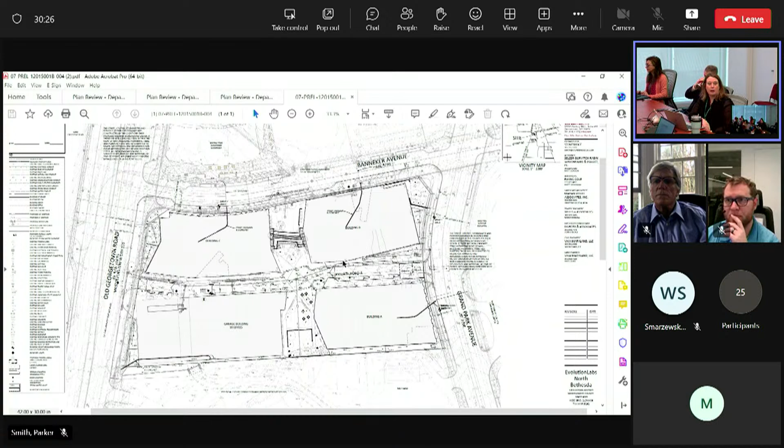I'm gonna turn it over to Josh. Don't turn it over.

Just so everybody knows the structure of the review, Parker's handling the sketch plan and site plan. I'm handling the preliminary plan.

So you got the comments at this point. I think the way we'll structure the meeting, we'll start with the transportation comments, then we'll go to the parks, and then we'll work with the urban design team on their comments. So we can start with the roadway improvements and go from there.

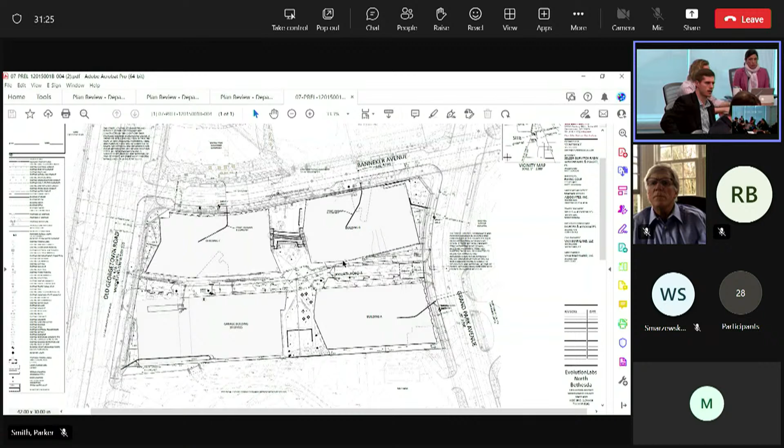No, let's start with roadway improvements. Sounds great. I don't know, Matt, if you want to, we've had some email correspondence going back and forth over the last 24 hours, specifically about the request for some offsite improvements, bike lanes, Grand Park, and one other. We're going to talk to DOT about that, but for frontage improvements, because we want to nail down the design and all those details. I think we could talk about that today.

I don't think we really need to worry about the offsite stuff. We can work with DOT on that. Well, DOT is here, so. I know, but it's sort of a separate issue from the design. It's more like whose responsibility is it for the cost.

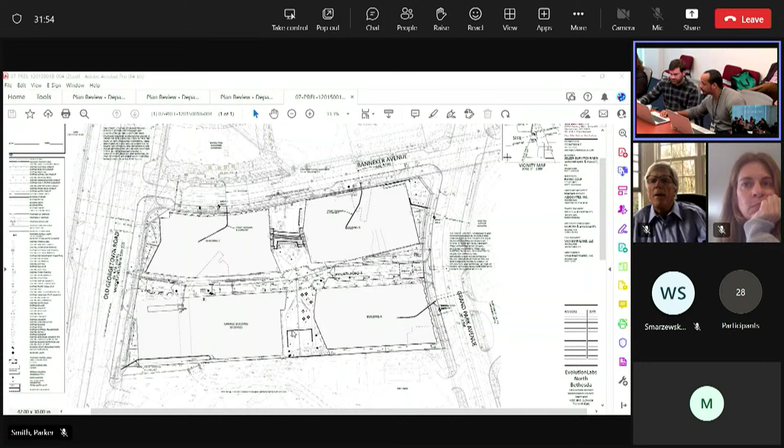Okay, yeah. And I guess in regards to the design, is there a particular street we want to start with that y'all have concerns with at first? Because we can kind of just work our way through. Whatever you wanted, yeah, we'll work through them all, I guess.

So did y'all see the attachment for the preliminary plan, like this document, or sorry, I'm not sure.

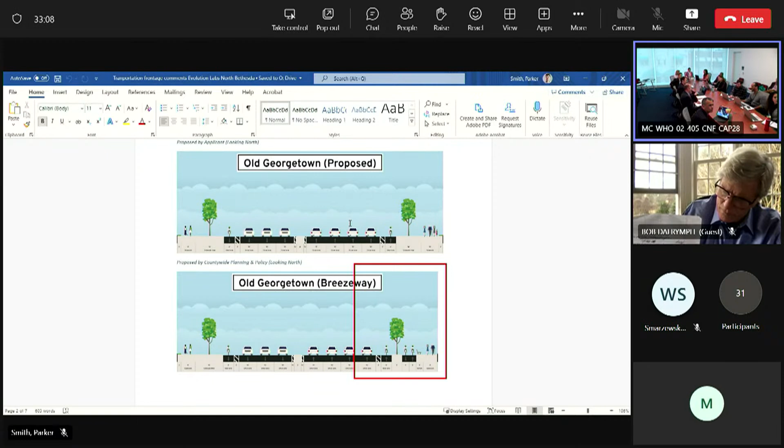So sorry, I must admit, this document here that's up on the screen, was this included in what was sent back? Yeah, I uploaded it. It's an upload document under the preliminary plan. So if you haven't seen it, basically it's showing the cross section and the details of each right of way. Except for Banneker, that wasn't in there, but we will be able to provide that one as well. Yeah, that'd be helpful.

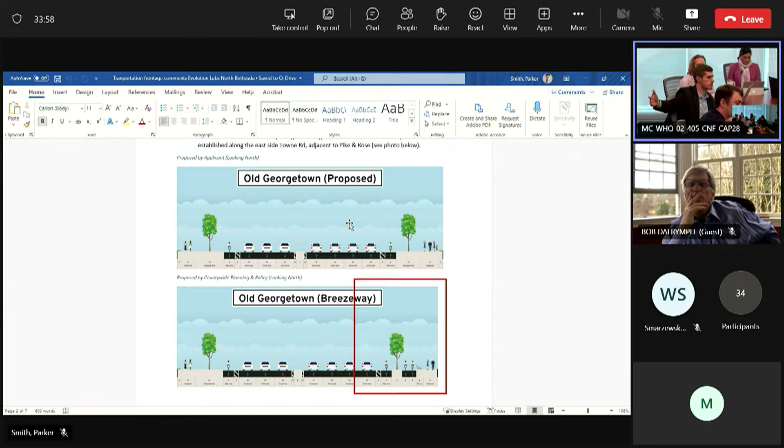I mean, taking a step back for a minute, these cross sections here - Old Georgetown, Banneker Avenue, Grand Park Avenue - it's part of the Western Workaround, right? All that streetscape is currently constructed, right? Like on Old Georgetown, there is a bike lane. I don't know if from curb to property line that's currently reflected, but is that essentially your comment? Is it that all the improvements that were just put in as part of the Western Workaround, you want us to change as part of our application to match these cross sections? Is that kind of what you're getting at?

So when we made our comments, we took into account the Western Workaround. A lot of the comments are curb to your property line, or at least with Grand Park, we're not necessarily asking you to move the curb out. What we're saying is repurposing areas that are within the Western Workaround, cutting it out. For at least Old Georgetown, we're asking you to construct the breezeway.

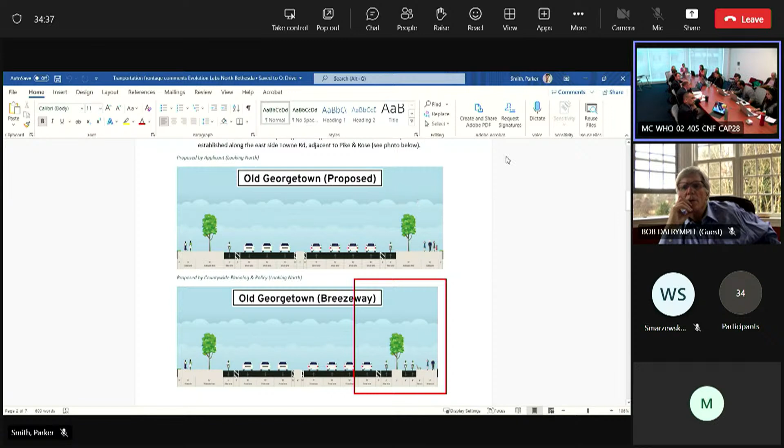So essentially what we're asking you is to provide this bikeway facility here. Currently there's just an asphalt path, and at the street there's stanchions or striping running up the street. So what we're asking you to do is to provide the planting buffer or tree panel, the bikeway, that's part of the countywide master plan. We're showing a bench here, but essentially a sidewalk condition into your frontage is what we're asking for, at least for this, and this is consistent with other areas along Old Georgetown.

So the 14 feet, just to be clear, plus the sidewalk area.

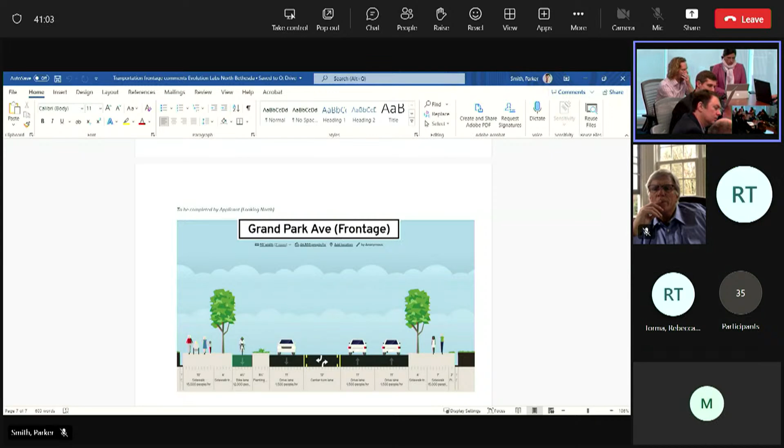Our hope there is that we could turn left to head north on Grand Park Avenue out of the private drive. Yeah, and we don't have a problem with that, we just wanted to align it. It's almost there, if you can just nudge it a little further and make it align better. Technical term, we'll nudge it. Got it. Well, I'm very technical when it comes to engineering, so.

We're talking about this side, right? Yes, that's what we're talking about, right.

Hey Rebecca, this is Ian at Vika again. There's only one lane coming outbound from that garage. That would mean we'd have to move that road a pretty substantial amount to the north. See what you can do. I think I'll have to get somebody else to look at it as well before we can say it's okay.

Ian, do you assume we're in line? We're already pinched on that building 5 footprint, and then with stormwater management and other things, but we'll definitely take a look. We have the line work, we need to look at that, right Ian? Yes.

Okay, great. I think that covers at least the access points, the frontage. Did we talk about Banneker access? Oh, I was going to jump to you mentioning the loading dock. Yeah, that's what I was going to jump to now.

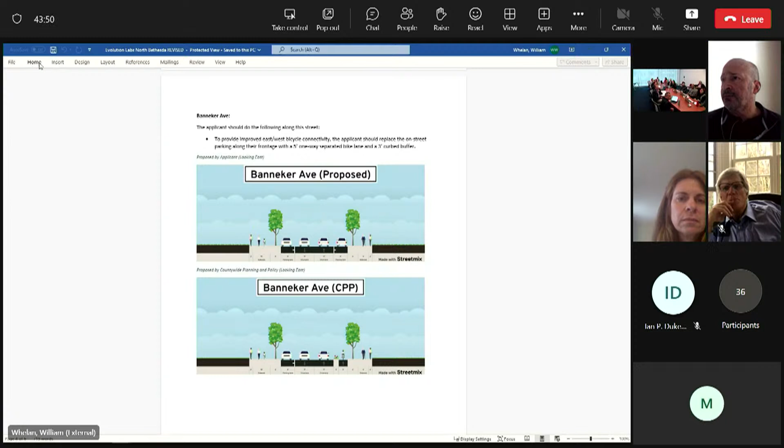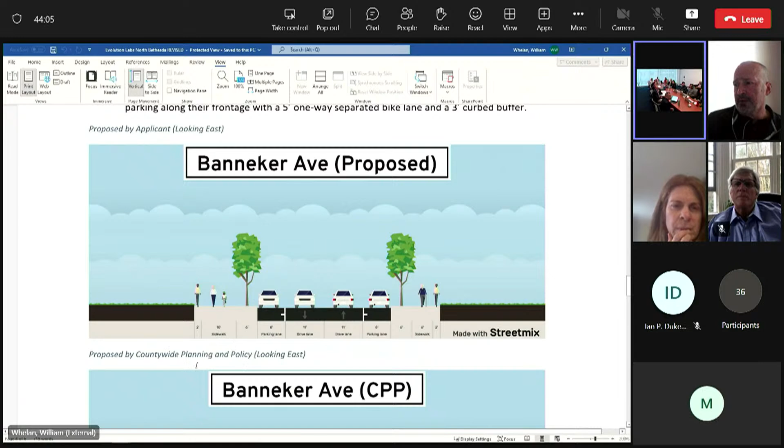So yeah, this is what's out there and it's going to stay. Because there's no bike lanes on Banneker, right? That's correct, yeah, there's no proposed bike lanes - the bike master plan doesn't call for bike lanes on Banneker. Not that I'm aware. Correct. Yeah, that's correct. And this is the applicant side over here, on the right, and this 10-foot sidewalk is already in on the opposite side.

Okay, jump back and share the screen.

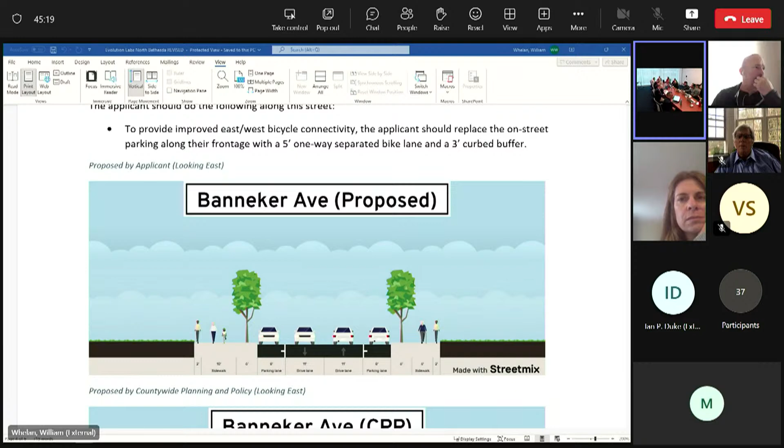Before we move off of Old Georgetown, Troy, you made a comment about undergrounding utilities on Old Georgetown - you're talking about the telecom lines over there, correct? I guess it's just a general comment, in regards to if there's anything the Western Workaround has underground along your frontage, we would be looking for those to be underground. I think Old Georgetown had some, at least from the street views. I didn't see anything else on Banneker or Grand Park.

Let's discuss the building loading dock. We've been talking about that access point for a while, so I'll give it over to Eric to speak.

We're looking for it to be relocated to the internal private drive or private street, to remove that access off of Banneker.

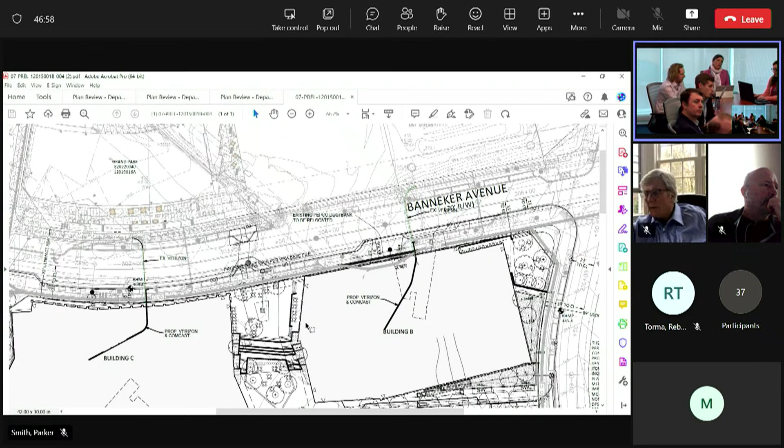Got it. So yeah, we spent a lot of time talking about this previously, and we met with you guys a couple times to go through it all. We studied it physically, and we can make it work physically. We still think though that it compromises the overall site design, and more specifically compromises the through-block connection, which we really think is an important aspect of the site plan.

If you wouldn't mind zooming out for a second so I can speak a little more to that. So with the way Building B is designed, and because we really can't get truck turning movements to come off of Old Georgetown, most of the loading is going to have to come in off of Grand Park Avenue.

Based on the geometry of the building, the way the roads are angled, the grades, how all that's shaken out on the east side of the site, trucks are going to have to turn in and basically stage on the Woonerf, right in the very middle of the site where all the pedestrians are coming to get to Buildings B and C, in order to back into the loading dock for Building B.

In addition to that, the way the grades are working, we're having a really hard time figuring out how to get the loading dock elevation to work with the existing grades, because the grade is sloping west to east fairly aggressively at this point. Yeah, the ground floor of Building B is actually partially submerged in that corner by like 6 feet or something, in that southeast corner.

So it would really impact the sidewalk we have over there, the access through the middle of the site for pedestrians. We just think it creates a conflict that would really impact what we're trying to create in the middle of the site.

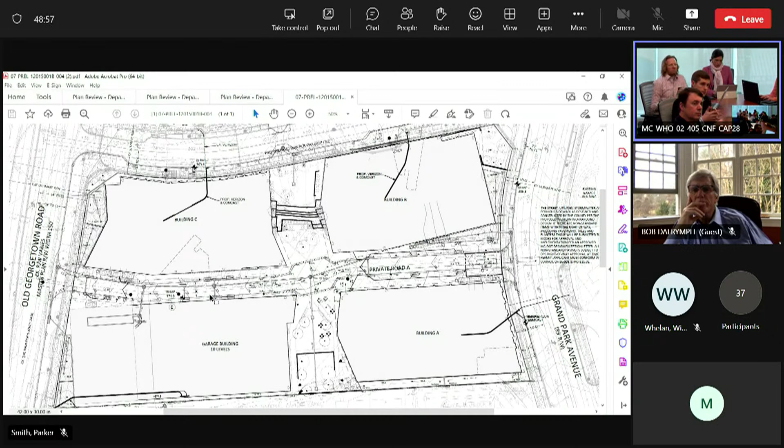So our proposal is to continue with Building B access on Banneker. I think it creates less conflicts with pedestrians and overall site flow through the site. There's really not a lot of activity that's going to be on that north side of the site there, so we don't really see it as impacting too much what's happening on the other side.

I know they've got a bunch of retail on the other side of the street, but the master plan intent is that the north side of the street is really the pedestrian walkway, with the wider sidewalk and stuff. So we're happy to continue discussing it, we're open to ideas. We've spent a lot of time looking at this, and we still think that for Building B, it makes the most sense to have that on the north side of the building off Banneker.

Chris, if I may jump in - for Building C, how does the truck go into the loading? Isn't it the same way, that they have to drive all over the Woonerf?

Staging to reverse and pull in, they're towards Old Georgetown, so they're basically between the parking garage and Building C, and then they pull in. For Building B, their position would start through the Woonerf, and then they would back in from that location.

I think there were comments about enhancing or making sure that we had trees and sidewalks across this east-west access. That's absolutely the way we see it - having the ability for pedestrians to flow east-west in addition to north-south.

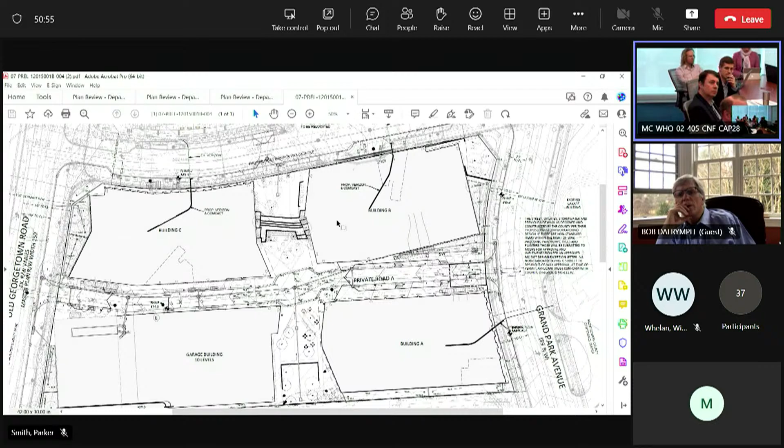If I just have a question - logistically, do we have to decide this with this application? Because you're not building that building right now. But it's a preliminary plan, so if the access points get set, I think we sort of have to decide it, yeah, with the sketch and circulation.

As we noted before, Banneker is supposed to be a very significant east-west street for the whole plan area, not just development. It's called Market Street Promenade, and we're really trying to locate active uses along it on both sides of the street. We understand you all don't have a lot of doors opening.

I think that's a compromise we've kind of arrived at with you all, given your program requirements. We're still trying to minimize completely inactive and service frontages along that street. And so there's Banneker, and then there's this parallel street that you're creating.

Even in the way the private road A is currently designed, it's really serving two purposes. I think you guys are struggling with that yourself, in that you want this to be a very pedestrian-oriented Woonerf, but it's also the main access to this parking garage that has all the parking for this project in it. So it is going to have a lot of car traffic on it.

So I think that's kind of what is at the table here, is this tension: is this really going to be a pedestrian space in the way we are talking about it? Or is it going to be more of an alley, service road that services these very functional aspects that the buildings also need?

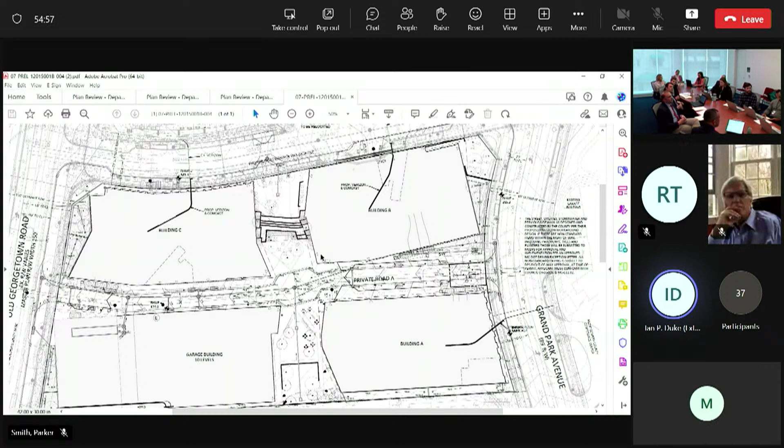So that's why we felt it would make more sense to have limited loading activity with a loading manager for building B's use. And like I was saying to start with, it is complex because really it's almost like—

From the Woonerf east, it is a very mixed, vehicular but mostly pedestrian space. And then from the Woonerf west, it's really more alley-like with loading and garage access.

And I think what we are trying to suggest is that if you're thinking of putting loading onto the primary pedestrian spine of the plan area, then you should really treat your driveway as a Woonerf along its entire length.

Ian, I think there'll be a lot of people parking in this garage who will be going to Wall Park. They will exit out of the garage, walk along the western edge of the Woonerf, and try to get to that through-block connection and get to the park.

So currently, I think it's two types of streets and the loading is off on another street. What we are suggesting is you either take the approach that this whole thing is a utilitarian roadway, with all the loading off of it, and you focus on the public streets as the primary pedestrian movement and through-block connection, or you consider the entire length of the street as a pedestrian-scaled, pedestrian-designed Woonerf that gives the primary use of the space to the pedestrians.

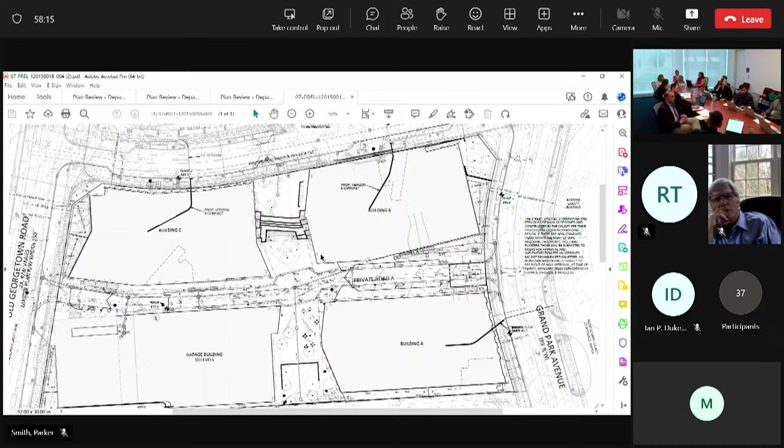Maybe as you are designing that woonerf, which sounds like it's going to be a private street, you're working with DOT and you're working with Troy, and Troy's pulling in the urban designers to make sure it's functioning in a way that accommodates all modes, because pedestrians is like the number one - we recognize there's a lot you're trying to do, but the shared street does have some great benefits, and typically it has a flush curb, so you can accommodate all modes in a smaller space, which is really great. So I'm wondering if some more design detail needs to be worked out, but the nice thing is we don't have to do that right now because we have a little bit of time before you get to the board to work out those details.

Okay. I think what you're suggesting is where the conflict is - essentially that middle street seems to be more of an alley with a very nice green open space coming inward across it going north-south. The conflict is trying to make the east-west street after that crossing something special, and I don't think it necessarily can be that.

Because of all the parking and the services and so on. The other thing is that as you stated, Banneker is going to be a very, very important pedestrian street, particularly on the other side. And I would suggest, particularly coming down from that other side across the crosswalk to that corner, where you really only have the quote-unquote public space besides the lobbies on these buildings.

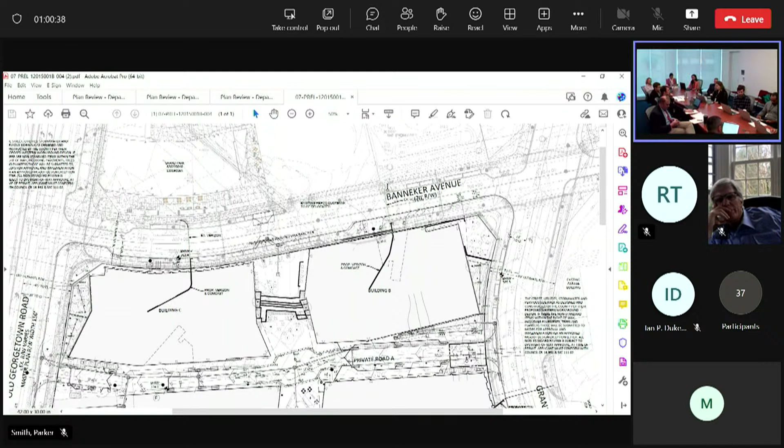And I think we really need to follow the master plan on Banneker and make it as special, absolutely special, as that other side is going to be. And if it's all said and done over there, dynamite, and I think it will help. I mean your people are gonna want to cross and go over to that, I would imagine, frequently. So all of that - we need to enliven that street as much as possible, and without service doors.

I think we need to see an alternative iteration of this. First, you'll have to show us what the loading dock in the street is doing. Then we probably need to look at a version of the shared street or private road A, designed in its entirety as a shared street, with a loading dock on Banneker that's as compact and tight as possible. Then when we look at those two things, we can work with you to get to a decision that works for everybody.

Carrie, does that make sense? I was just going to ask if it was clear. Basically, what we're saying is the Banneker loading dock can stay, however, on the condition that the shared street, the east-west street, is more of a shared street.

We can show you some examples of where we think that works. Having trees is so important to that experience, having a slow area where people can drive but not at high speeds, and pedestrians first throughout that corridor. The activation at the ground level is also important. I know that's a further detail, but those things are all coming together. Hopefully that gives you a pretty clear direction of what we're saying.

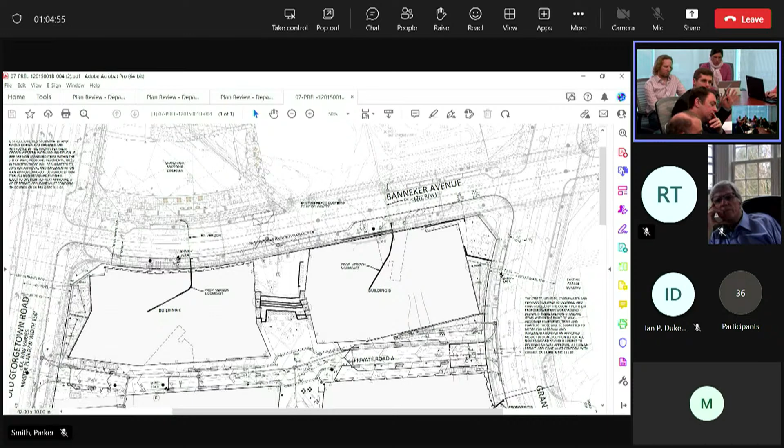Okay, well, let us take a couple days to come up with some sketches. We can pull the old ones we did from the fall, Brett, on the interior stuff, and really study that west half, then we'll regroup with you guys.

Another project under review right now that I think has some similarities might be 5500 Wisconsin. The drawings are all public, you guys can look it up. It does have a similar condition, there's a through block connection.

One in Friendship Heights. It has parking and loading entrances off of the space, some lobbies and things, and I think that applicant team is working with us extensively to make that a pedestrian-focused experience.

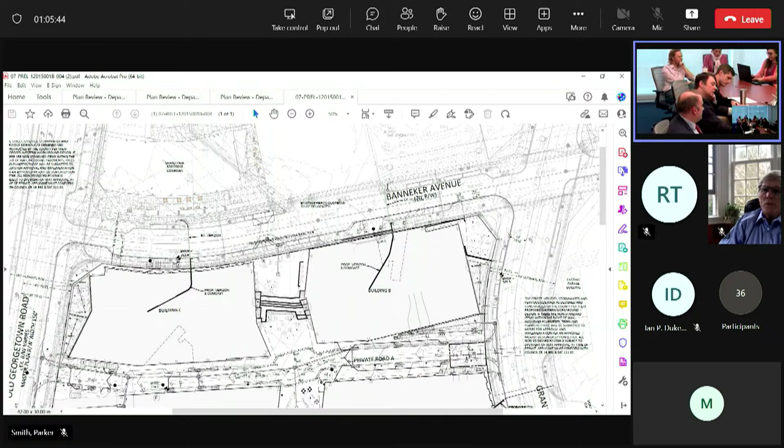Brooks Brothers site, yeah. So the latest version that's online has your comments incorporated? I believe so. We'll look at it.

Without all the complications of working with the village. Yeah, ours is easier.

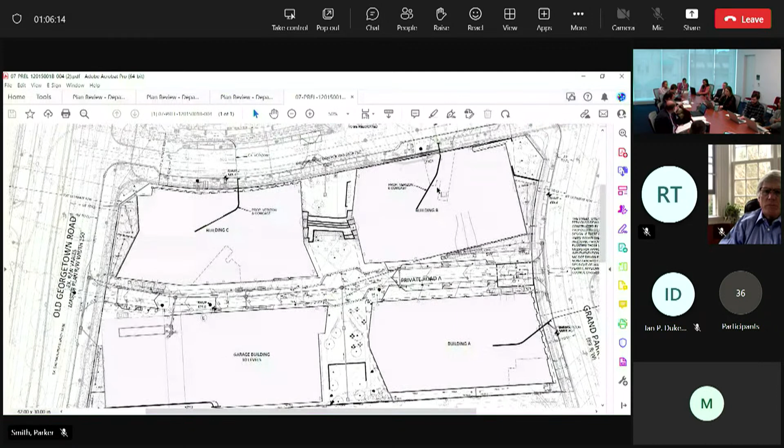Troy, I think we covered that, at least the transportation half. If there were any other major conflicts, I guess we missed them. Ian, did you have anything else on transportation? I don't believe so.

We had some minor suggestions on the architecture, follow-up comments or questions. I think we'll get to that later. Yeah, we can jump to the comments at this point.

I think what I had structured with the stormwater management facility is at least tied to this work program, at least to the site plan. So I know the original comment was that that should be relocated back onto your site. And of course that component is tied to the facility.

But just to be clear, there will need to be some stormwater management over the roadway. I believe it's fair to accommodate some of the stormwater management for the parking of the building to replace the wall park surface lot, which is my understanding of how it was organized with the tables. That was our original intent. I think I communicated unclearly to my team, which is why they showed the whole garage there.

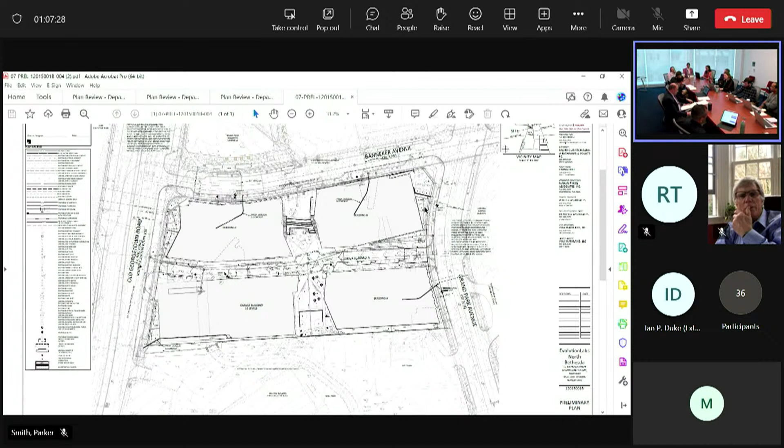Yeah, I think there may be some room for discussion along those lines. The standard starting point is looking at parkland, and if we are using parkland to provide stormwater treatment for another private development, that's using parkland for private benefit. Yes, it's for the public, so that is not our intent. I don't know.

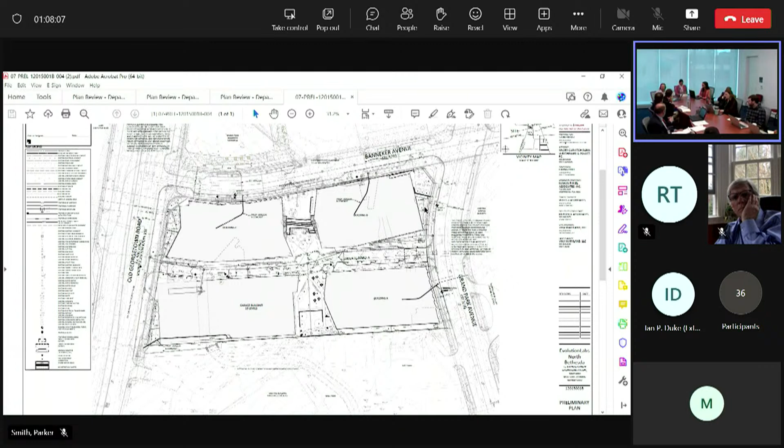I think our initial take looking at the drawings was that it's hard to see that there, and I hear what you're saying about the access drive eventually requiring some of it. There may be a way to find some combination there, so I think it's something to keep talking about. But certainly any stormwater ending up on parkland is going to have to be related to the driveway and those things as well.

I guess that falls into the next part with the access road, where we're separating out the process. Essentially, I think we've all agreed at least it's going to be some type of mandatory referral process.

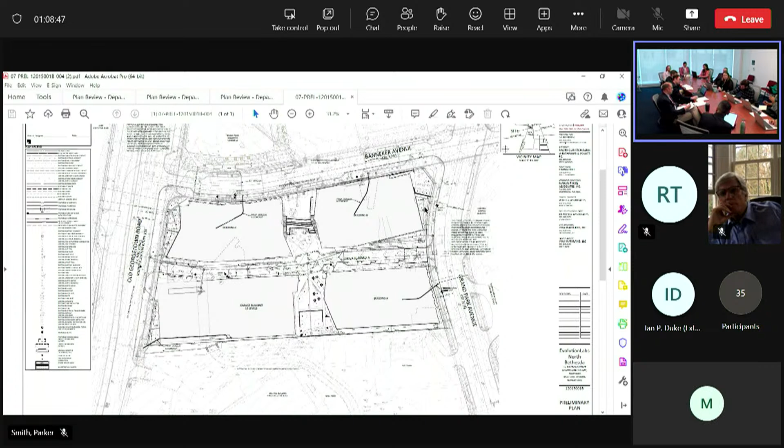For that mandatory referral, we will probably be looking for that to go to the board at the same time as this application goes. It's a 60-day process, so we'll be looking for that to be synced up with this joint application.

So Henry, procedurally, the Parks Department takes that to the board, not the applicant, but we need to get you plans and drawings. No, we're looking at this as though the county is applying for a project on parkland, and they would be the applicant for the referral. So we'd need to work with DGS. We would do it on behalf of DGS.

And so that kind of addresses the stormwater management, since it's being tied to the road, and that mandatory referral is facilitating the road. I'm looking at it all together. Right, as we've discussed, figuring those two pieces out, since there's a lot of intersection in how they combine.

I guess even with forest conservation, at least with that stormwater management facility, it would be tied to the mandatory referral, but also the forest conservation plan is tied to your site plan phase one, because the LOD depends on where the LOD is. Ian, you looked at that, right? There is an approved forest conservation plan under Gables.

Aside from the LOD that is on the Parks property, which I'll get to in a second, we have a smaller LOD than we had with Gables. I think most of that has to do with land that is now already taken over by right of way. We had other elements where we were reaching out for utility connections that we no longer need because the utilities have all been relocated and done. But our LOD is smaller — the certificate of compliance covers more than we would need.

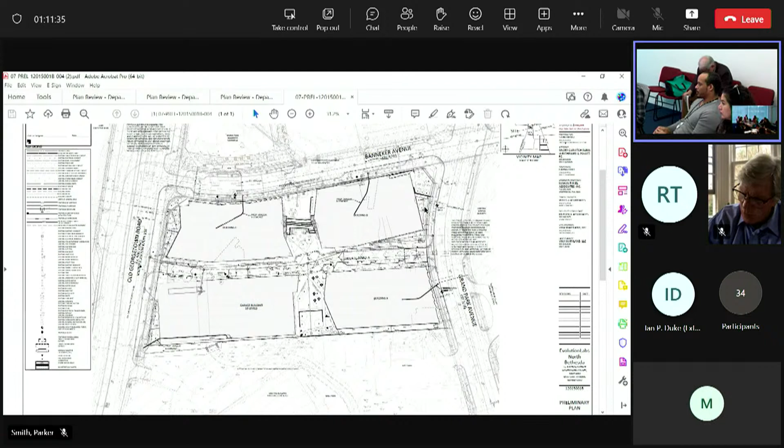So, just to be clear, we're gonna amend what we submitted to make it clear that the stormwater management requirements for the private development, the sketch preliminary site plan, is gonna be shown on that plan somewhere on our property. No idea where, but we'll figure it out, how we're gonna do that.

And then anything that has to do with parks and the access road, that's all gonna be shown in a separate plan that'll be approved through mandatory referral. Got it. Because that mandatory referral plan is something that could be done pretty quickly. Mandatory referrals require a 60-day review.

So the sooner you get that in, the better. We could potentially do that at the same time as this project.

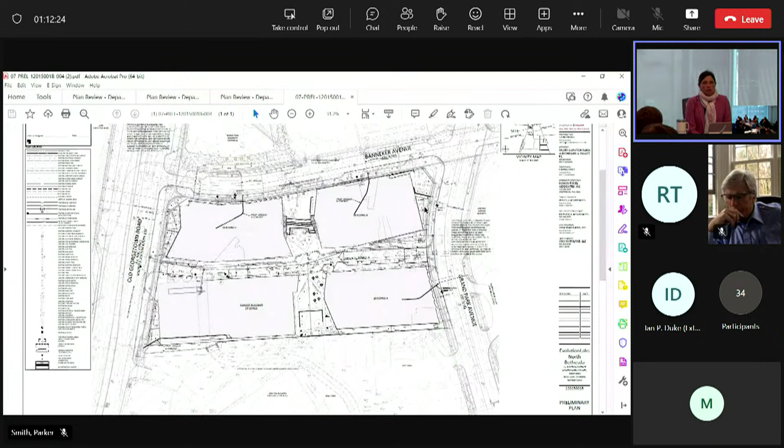Yeah, we just have a lot of work we need to do. Yes, I understand there's confusion on the number of spots, number of parking spaces and stuff. So there's essentially been little to no design with parks on what that roadway is gonna look like.

Well, if anything, you could start the conversation and we could try to knock some of that out now, just because there's so much happening.

Well, yeah, if the timing, so in our thinking here, the mandatory referral is kind of the parent plan, and it has to be, the FCP has to be attached to that parent application, whether it's a mandatory referral, site plan and subdivision, or maybe even a park facility plan.

So you could do a two-part mandatory referral. One is for kind of the disposition part of it, which you've already gone beyond that, I think.

I'm just wondering, somehow it's going to be difficult for us to, since you have an FCP that has to get approved with the park property, how we kick that down the road. Well, I'm not, you can't, it has to go with it.

Yeah, I mean, we talked about it a little bit yesterday. Like, I mean, we understand that we're gonna have to figure all this out kind of concurrently, right? Because I don't want something that shows on the mandatory referral, then go have to change what we have on the site plan. So, yeah, I mean, whether they go to the board at the same time or not, I think we at least need to have...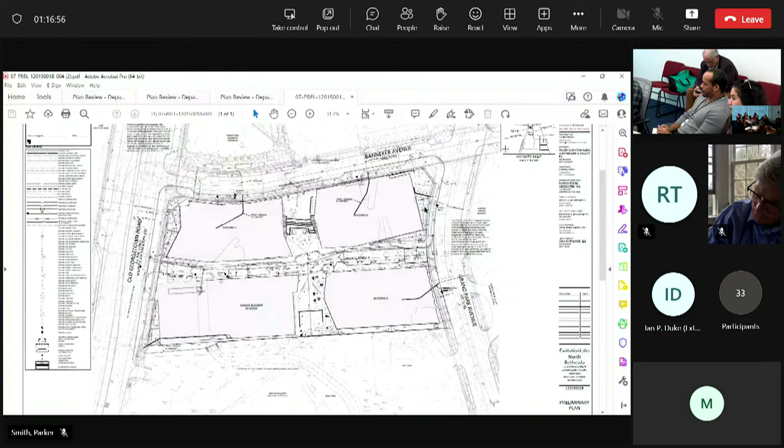It's okay to be determined, so we'll just leave a note on there and take away the dashed roadway. Right now it looks like you're building it, so it's too detailed. It'd probably work better on the access or connectivity exhibit, where we dash in all the different bikeways and pedestrian movements. I think it's fine to show it conceptually.

Like I said, we're going to be talking about it, and it'll be part of the planning board discussion. But I don't want the board to be confused about what they're approving.

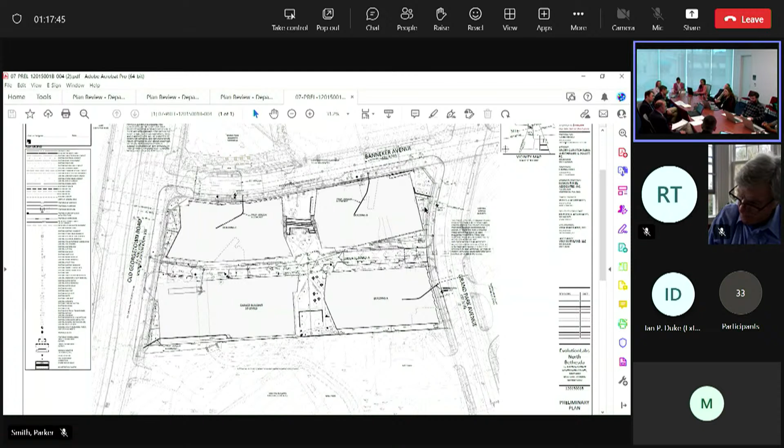Was there any other major parks comments, Henry, that you want to touch on? I think most of the other stuff we've started to work on. We're scheduling to get together again next week to keep working on this. I think everybody is on the same page on all the stuff we need to be working on, which makes me feel like there's probably other things to spend time on today.

I guess the other thing was fire access. There's a 50-foot fire access requirement that looks like it's going to be part of parkland, so that's at least tied to this site plan. Yeah, it kind of gets back to the roadway, the through-block east-west road. The fire department obviously needs access on the south side of the parking garage to fight a fire. We can't really push the garage further north because that would pinch the internal roadway.

The alternate is to just have a big concrete shear wall that's 100 feet high to get the fire rating needed, which I don't think anyone really wants to do because that conflicts with some of the design comments we wanted. So I want to spend some more time talking to Henry about it, see if we can come up with some ideas on what to do. We need to figure it out. It's a lot of competing interests that we need to take into account here, so I'm trying to figure that out.

Yeah, and that's definitely something that's got to be situated within the site plan and carried over to the mandatory referral. It's a site plan issue we need to figure out. Yes, I agree.

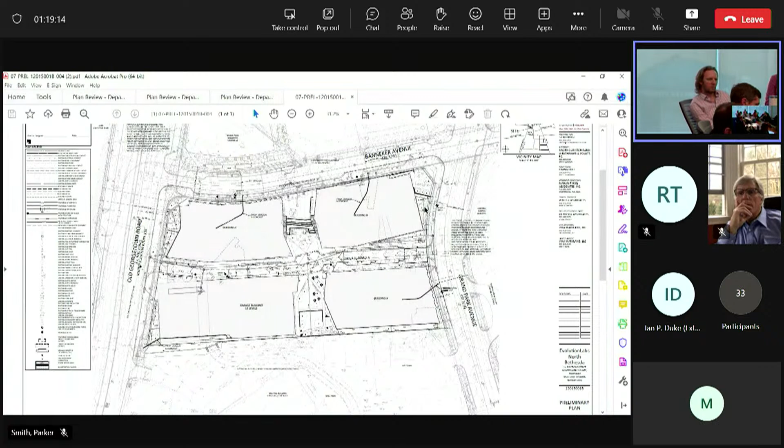So I think that covers it, unless y'all had anything else on the park side, and then we can jump to the urban design comments and the architecture. I don't think I have anything else for parks.

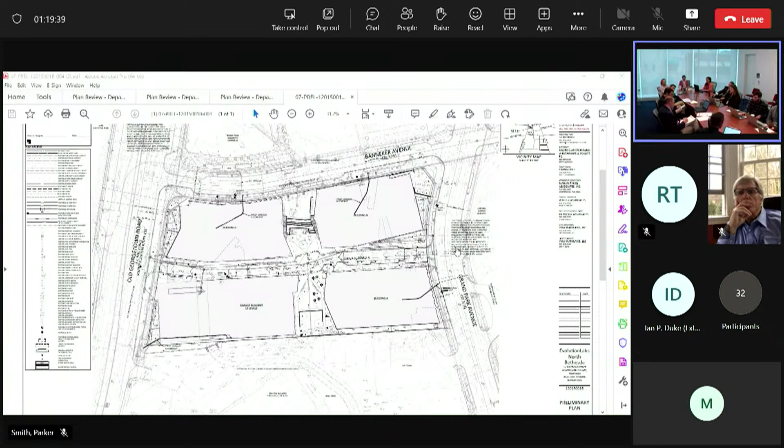All right, no, I'm not. Okay, I can do it. There we go.

To kind of summarize our architectural or urban design comments for the site plan application, I think you guys are suggesting that the northern area where buildings B and C will be is gonna be like an interim open space, so we just want more clarity on that.

I think our intent was that that just becomes a seeded, open lawn area. You proposed that it's not off limits to the public. We just want to make sure that it's not fenced off and it's open for use. I need to talk to Gables and make sure they're clear with that.

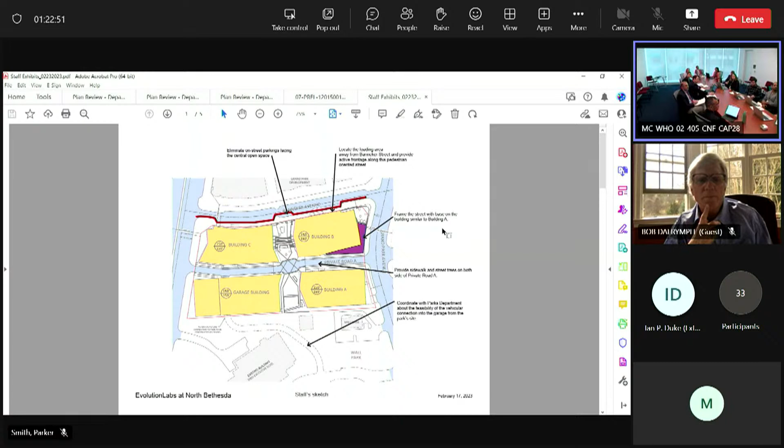Have you guys seen the renderings that we shared as part of our community meeting? That was the colored rendering last year, in December. Yes, we have some of those. One of the comments was to provide those images as a part of this next submission.

Yeah, I mean, we will. We could show them today if you'd like to talk specifically to them. So if we can provide it on a next round or some detail, you want to sort of pull it up? I can bring that up right now.

I can share them, Brett. Good morning, everyone. There we go, it's good. Yes, go to the next one. Yes, the next one.

So yeah, this was kind of... well, I mean, you can speak to this. Yeah, I mean, I'm not gonna pretend I'm an architect. But you do so well.

Across the entire site, we're looking at this lower area that is more pedestrian scaled, has a rhythm, a cadence to it. That was no different on the garage. We're going to look at some of the other comments in a minute, but generally because the site's sloping, we start at one side at a certain height, and then it becomes massive toward the other end of the site just because of the slope. So we get nearly a whole floor difference between the ends - we're at like two floors here, three floors when we hit Old Georgetown.

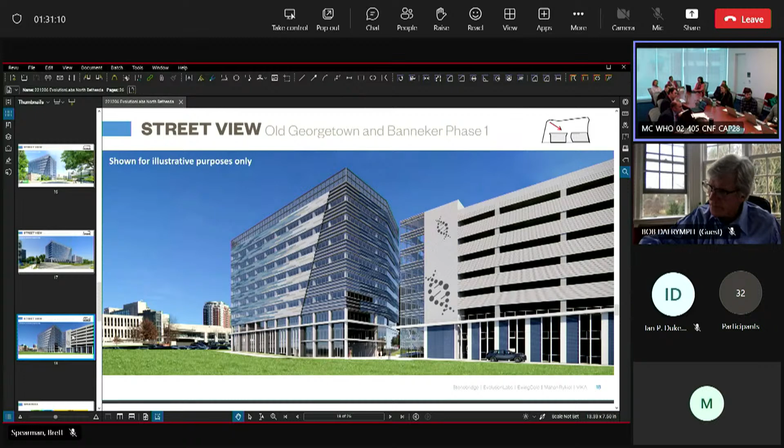Yeah, there were some suggestions on the elevations for building A that we submitted on our staff exhibits. I don't know if you saw that. We saw that, yeah. And so basically the idea was to take this elevation instead of breaking it in half, break it on the thirds, eastern elevation essentially. Would you mind sharing my sketch part there?

If you don't mind, staff. Yeah, it's just almost equal, not quite. But I think this massing that you are showing definitely helps us understand it better. That elevation was split, a bit in the middle. Yeah, it is kind of in the middle. So we thought if the proportion would be like 1/3, 2/3 or something in that range.

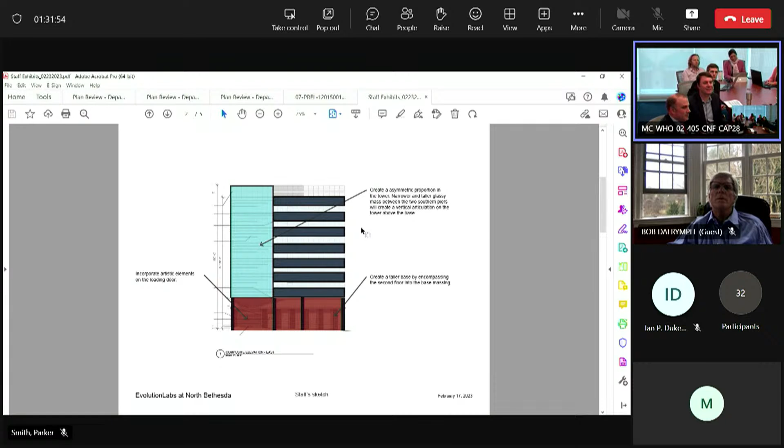Kind of like extend through one of the columns that you have at the base. We thought that would be a better proportion if the glass part would be narrower.

Yeah, and I think the reveal, we're also coming out, it's inflecting a bit, yeah. Right, we figured that later when we saw the other. We noticed that your base is extruding out with the shadow, so that's why those massing and perspective views will help us understand it better.

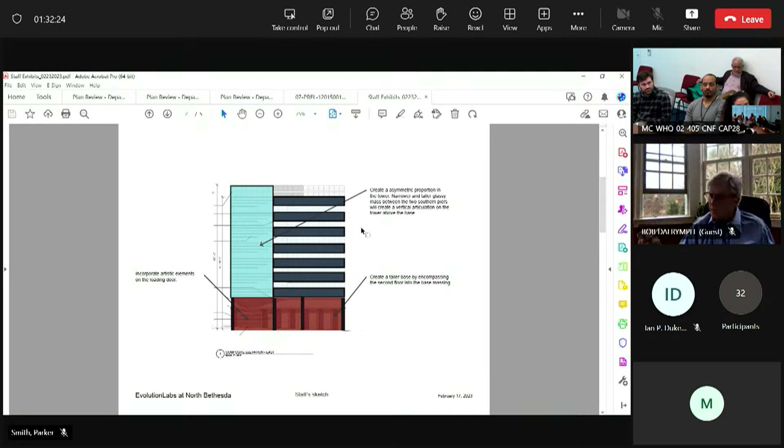One of the comments was there's a lot of the horizontal, and this actually adds more of the horizontal to the east end. I totally appreciate where you're coming from with the approach. And you know, for the base, we really set a datum that felt right on one side, and maybe it feels low here.

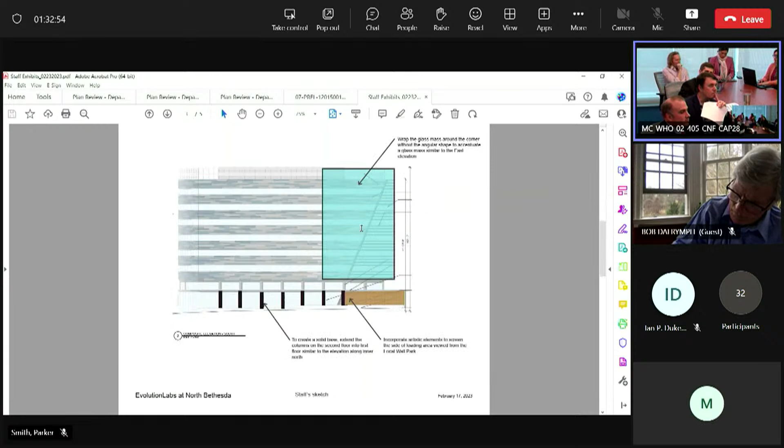I think it's the other elevation part, if you go to the other one, we noticed that loading area at the bottom, that's also going to be very visible from the park and from Grand Park Avenue. So that needs to have some sort of treatment. To some extent, I mean, placement, I totally agree. That corner, a lot of this does start to get hidden by the bank building that's currently there, maybe by vegetation there. Yeah, and there is currently vegetation, I think there will be vegetation.

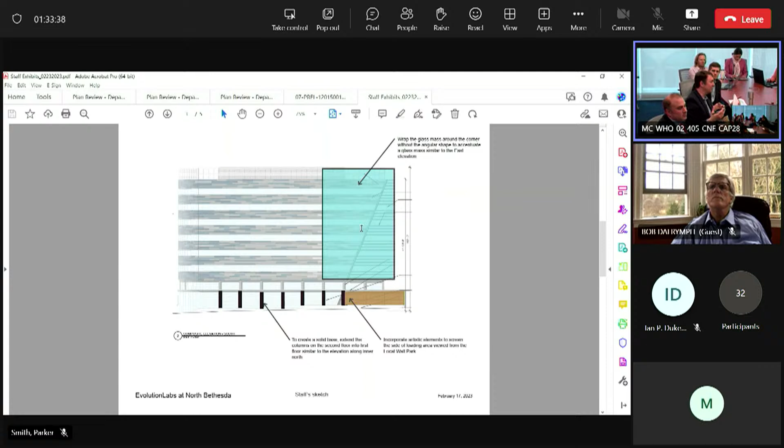But what you're proposing at the base, and certainly looking at this elevation, it definitely enhances it. I don't see any issue looking at that. I agree with the comment that the lower portion, when the diagonal goes through, seems forced, and it's totally not necessary. So yeah, that kind of approach. That's such a... yeah, I'll take that.

Perspective also, the rendering that we just saw I think also begins to dissolve the overpowering horizontal. Yeah, the elevations kind of have that, but I guess they don't read quite as well as seeing it in perspective.

Yeah, one of the things the elevations don't do, which I think the reality of the material will be, is that the glass will really reflect sky more often. The elevations, the way we drew them, were sort of a light blue. In reality it'd be a darker blue. So what we're reading in the renderings is that the lighter color of the spandrel will pop more against the blue.

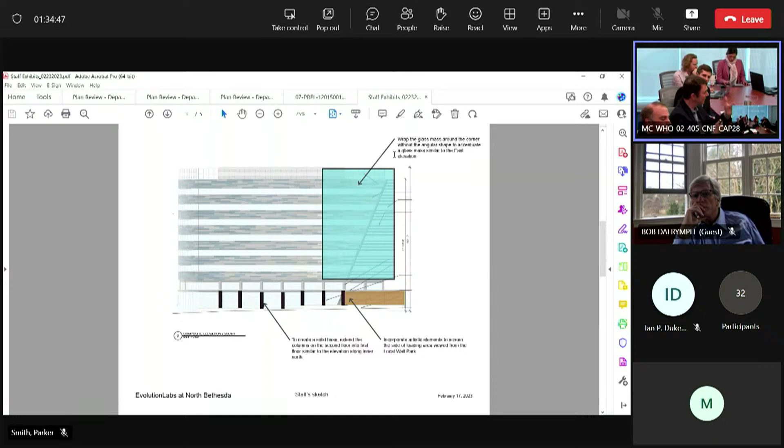But then when you get to the side where it's the darker blue on the spandrel and the blueness of the sky, those will feel more monolithic. So we intentionally split near the area where there was the most contrast for a little bit more effect. Yeah, there was a clear intent in the way we handled the color and that gradient.

My comment on the angle was just, okay, look at those angles - I wonder, it's like a 15-degree angle. Why isn't it a 20-degree angle? Why isn't it a 10-degree angle? What was the purpose? Oh, it's totally driven by the floor to floor and the spacing of the columns. So it's set because of just setting up something that works with the building.

Are you all considering some sort of certification for these buildings? Yeah, we will pursue LEED certification. Planning for silver right now.

Since that is kind of the base standard, pretty much I think the IGCC is going to force your hand to do a LEED silver building, whether you get certification or not, right? Yes.

Is there an idea - because there are some portions of the architectural facades that have fins and some have more projections and less - I'm sure there's some rationale behind it, but it would be good to understand if some of that is being driven by trying to create a more sustainable building.

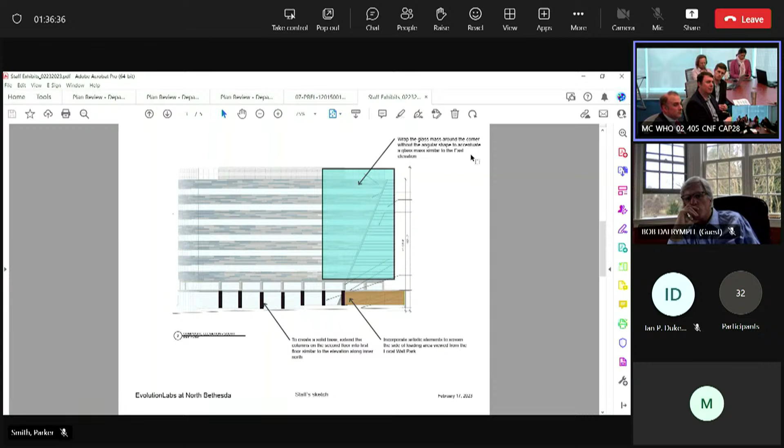Obviously, if it's not clear, the spandrel really helps to obscure that view of the equipment. That's why it's a little bit larger than maybe an office building might be, where they can deal with the cavity between the ceiling and floor. So it has a little bit more depth - we're trying to do something special with that.

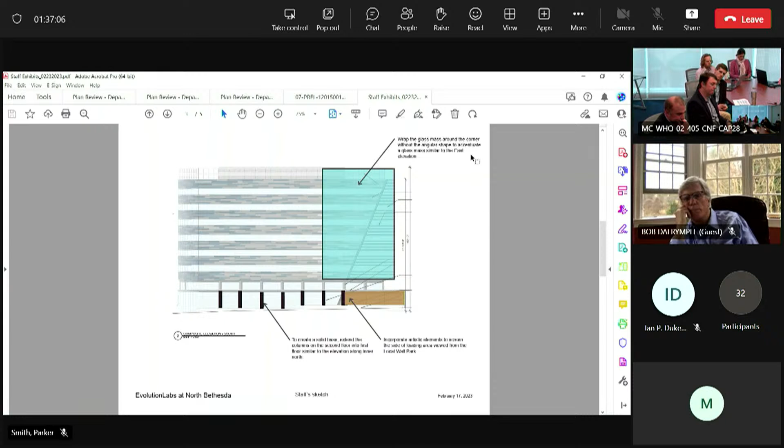No, we haven't specifically created broad sunshades on the south side to address sun. Well, that might be something to look at to try to create some variety along this very large building.

It wouldn't be such an enormous leap to go from a silver to a LEED platinum building, but it will reduce costs over time - the strategy. Solar panels on top of the garage. Screen.

I feel like that was a discussion early on, whether solar made sense. Yeah, it's been thrown out a couple times. I know the garage in Pike & Rose has solar on it, and they got state funding for it. So there might be some financial incentive to do that.

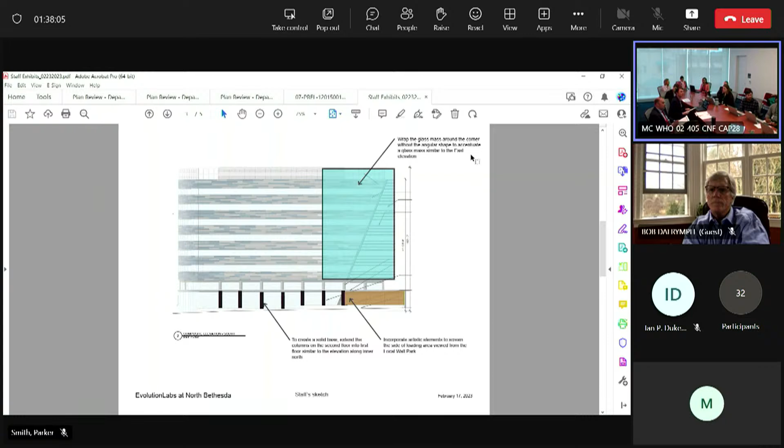And then I guess the other question or comment was relative to Building B - the massing of Building B. If you go to the first one.

If the thing comes to private road A in the future - it sounds like that intersection's got a lot of work to do. We've got to adjust it to try to meet that. Across the street, you're going to have to be doing the same.

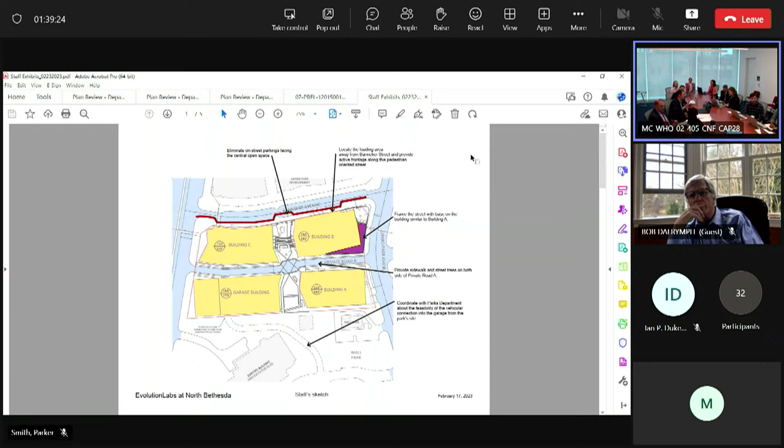I think what's reading weird here isn't the reality of it, because the base of building A is actually parallel to building B. We see it where it kicks out with the dash line, but then we don't see that on building B. That point on the southeast of building B is going to be very awkward.

What I'm saying is it's literally parallel, so it would almost be a straight parallel line there, where you read both bases of the buildings together as related. The towers might be skewed, but the base is framing the street. That's the intent.

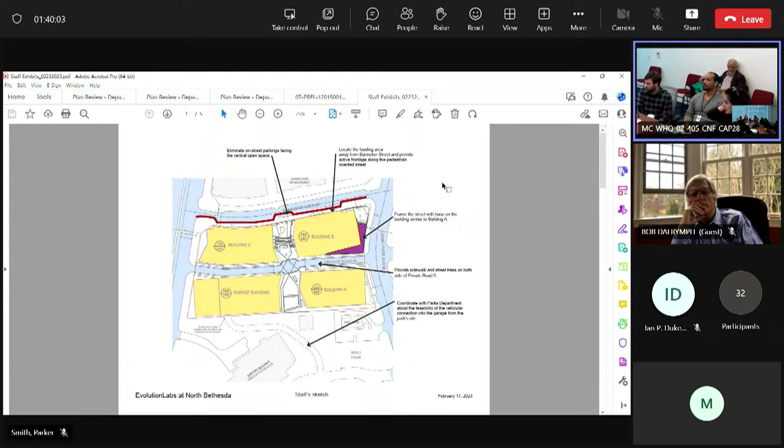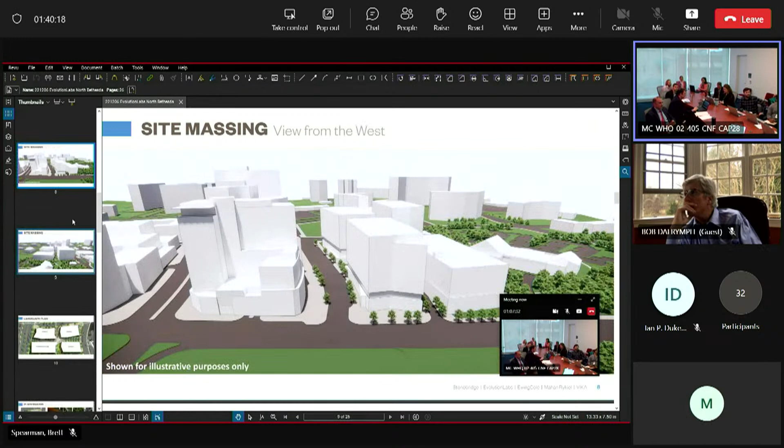I'm enjoying this conversation about it. So let me pull up the massing. This might change a little bit when you try to realign private road A a little better. I think that would take out from the area available for this, and it might naturally just align your building.

Oh, actually, do we not have that? I don't think we had that one in the presentation. Let me get rid of this. Yeah, so if you look there, literally what the base of the building is doing relates.

These buildings, the sort of shift of B to angle up, was really meant to make these geometries all kind of feel like they're acting together. Those lines are literally based on the same angle - they're parallel. There was definite intent.

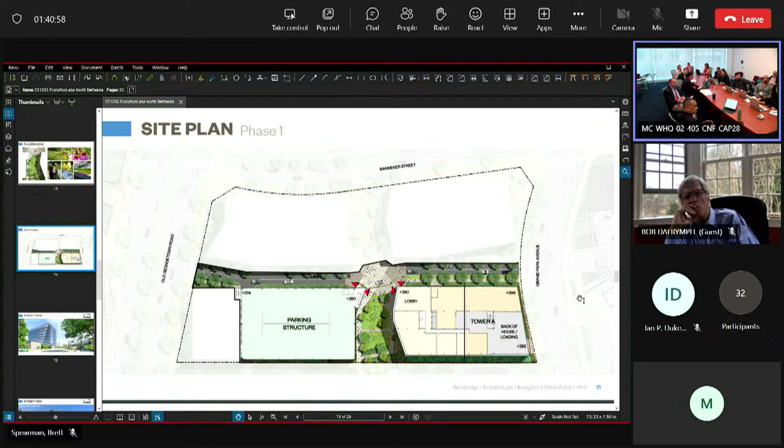We don't have this image in here, but the base of the building here would then be the same as the angle of the building. And then the wing that comes out on building B relates to this - can you see this cursor? So the wing on building B is parallel to that face.

Why don't we, when we get back, send you guys these renderings - some kind of white massing models from a couple different perspectives that show all three buildings, the whole campus. So we'll send you that so you can better understand how it all relates. That would be great, thank you.

Like I said, at this point we're not really asking for that to be acknowledged - we'll determine after we look internally if we still stick with that comment. And building B can be adjusted as the site plan changes when you guys come back a little bit.

I just think I want to open up the spaces in that area, since you're already kind of tight as far as the areas you're using. If you look at my comments at the sketch plan, I kind of told you to strike out some slivers. The public open space is really supposed to be an activated and usable space, so if there's stormwater management or transformers, we really don't want to see those types of spaces.

I totally agree with that comment. I think the person doing the hatching got a little crazy. Don't look at me, I didn't do that. I'm not looking at you - if you want to hit me for making an off-the-cuff comment like that, go ahead.

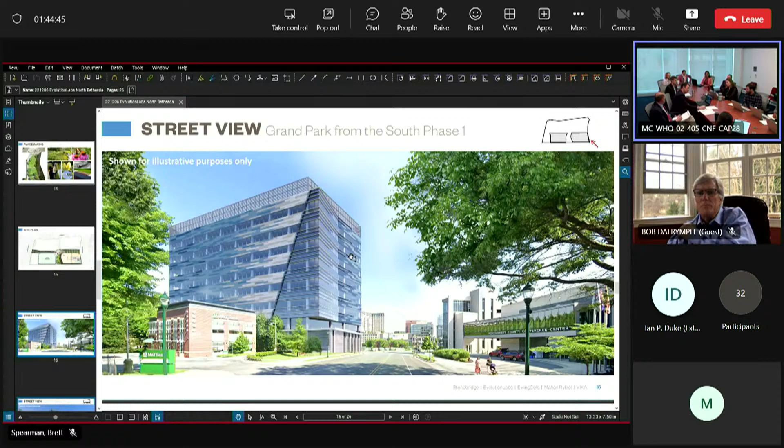Sounds like a complicated project, so you guys are likely to put in for an extension anyway. I was thinking we might be a month early. Yeah, I'm gonna write that down.

We want to keep schedule, so I think we need to work concurrently with Henry and DGS to get the mandatory referral moving. Right, I mean, Christian, yes, we want to get to the board, I think, in June.

Yeah, it was like June 8th, 6th, something like that. I understand there's a lot on our end, so you have 11 days to get your submittal.

Yes, what we could do is, instead of forcing it, in the review cycle there's opportunity for more than one resubmission, right? Sure. So we'd rather probably work, maybe we'll resubmit in 11 days, but if we're not ready, we'd rather keep working with all the stakeholders, everybody in this room, so that we can make one really good submission to keep our hearing date.

Regarding the mandatory referral, it's up to Henry, but one suggestion may be to have a very long meeting about that topic before you actually finalize any plans, because there's so many moving parts and so many different stakeholders. Natasha's on the Mid-County team and can help, even if we're in a work session, sketch out stuff, whatever, but it's just very complicated and there's lots of...

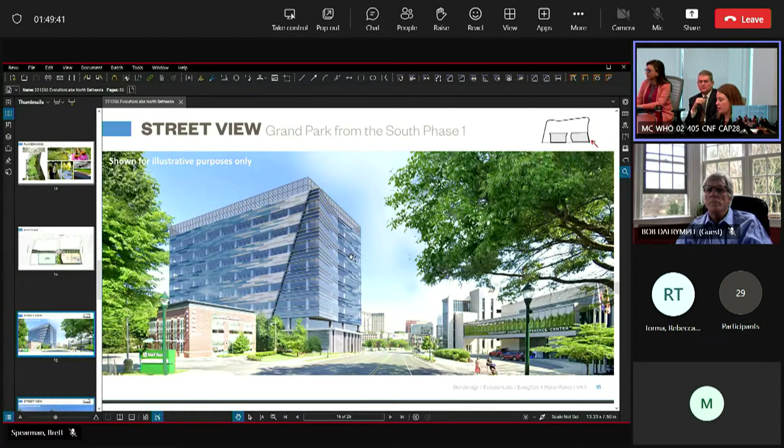Hey, oh yep, Christine. For the meeting, I need to see if Tim Couples needs to be involved, so we might need to reschedule based on his availability. Okay, well, we're shooting for Tuesday, tentative, the time's not set yet. Okay, thanks. All right, great, thank you very much, bye.

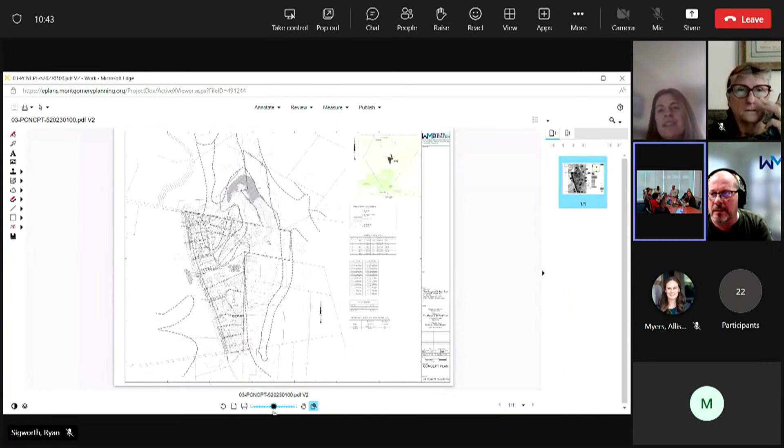I'm going to turn it over to Ryan to highlight some of the major issues. You guys are breaking up, it's kind of hard to hear. Okay, like the whole thing was just kind of breaking up for me, at least. Yeah, for me too, it could be my internet. Nope, give us a second, we're going to switch rooms and log off and log back on. Okay, thanks, would you go up to 3? Yeah, let's just go.

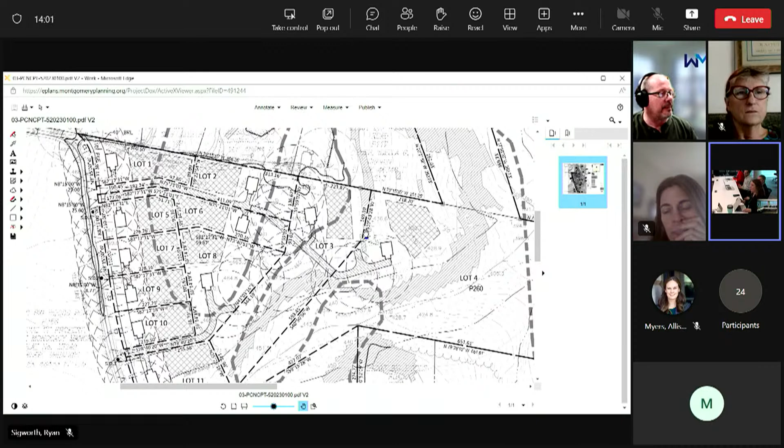Go ahead, Ryan. So this is a concept plan for what would be a future preliminary plan application. I think the main issues here are the lot size for septic and wells, and how to fit that with wells, septic, and stormwater, along with the minimum lot size required for septic. The shared driveways, especially the one at the top, are an issue, as are all of the shared driveways on a rustic road. And then the environmental features, and the fact there's no approved NRI on this property, sort of impacts how that will happen. I guess the biggest issue or change is the overall design of the subdivision, and having to try to fit that into the regulatory structure, both this proposal and the sketch, which we'll show in a little bit. I think that's generally the overview.

Okay. Are you officially flipped over to the applicant at this point?

Yes. Okay, thank you. I've been looking through the comments, and I think it was Dustin Mathers who issued the well and septic comments. We were going through basically what it would take to address those, and that tied into some of the shared driveways and panhandle lot formations we were using. If I hold to Dustin's criteria, the big one there was the 50-foot separation between septic areas. The lot area wasn't a big deal to get over.

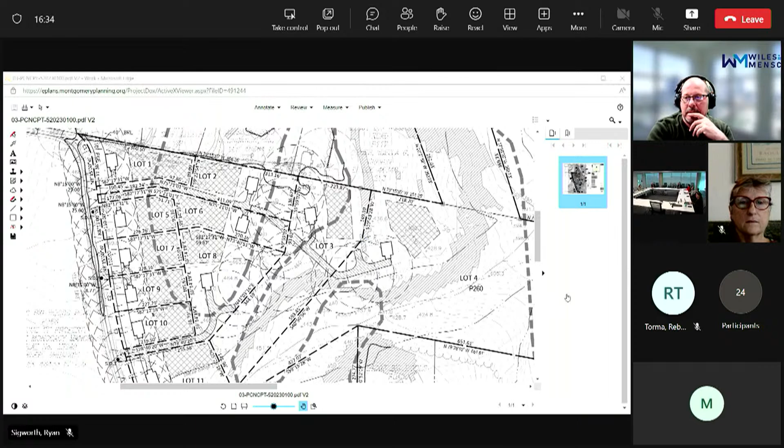Is it possible for me to share my screen? Yes, go right ahead. Okay, cool. Here we go. So are you seeing the screen here? Yes. Awesome, thank you.

So we have reconfigured these lots to be larger. They're all over 40,000 square feet. We've maintained a 50-foot separation between septic areas, and we've limited this access to a maximum of 4 on this driveway easement. We've also done away with, technically, all panhandles.

These are 100-foot wide frontages here for proposed lots 6 and 7. And then on this side, we have one shared driveway here and one shared driveway here at the end of the subdivision, again holding the 50-foot separation with the setbacks.

We can fit all the wells in. We've tried to stay without overlapping the boundary by more than 5 feet around any of the perimeter, and we've honored the adjacent well sites as well.

So to me, I guess the biggest concern on our end is kind of the panhandle interpretation. If we were allowed to get another panhandle, or one panhandle lot out here, I think we'd have a good shot at getting 3 lots in this general area rather than 2. I'd like to get staff's feedback on that, because I know panhandles are frowned upon these days.

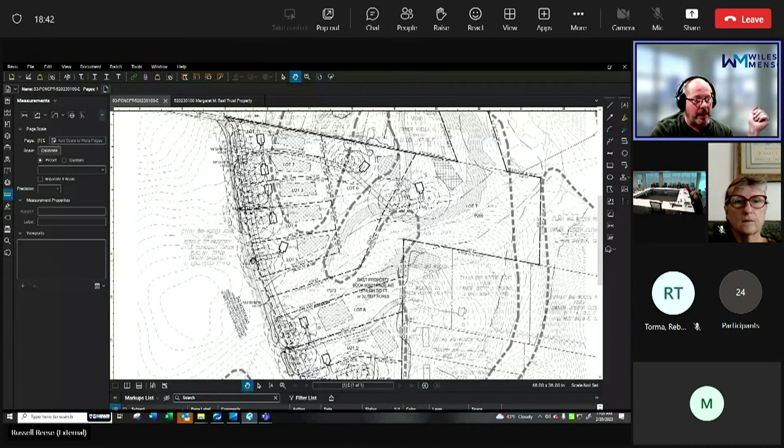We've done the sight distances for these. These all work. I could do another shared driveway entrance here on lot 5 and run a shared driveway back into this area if we were allowed to get a panhandle over here. So I think that's one of my biggest concerns, because that would take us to 15 potential lots.

It might be a little less painful for the applicant, and I think it would also give us a really good sense of what the soil is going to do out here in every strata. I'm kind of losing a strip through here that we could otherwise test if I could get another lot in the back. So that's kind of my major concern, the interpretation of the panhandle option.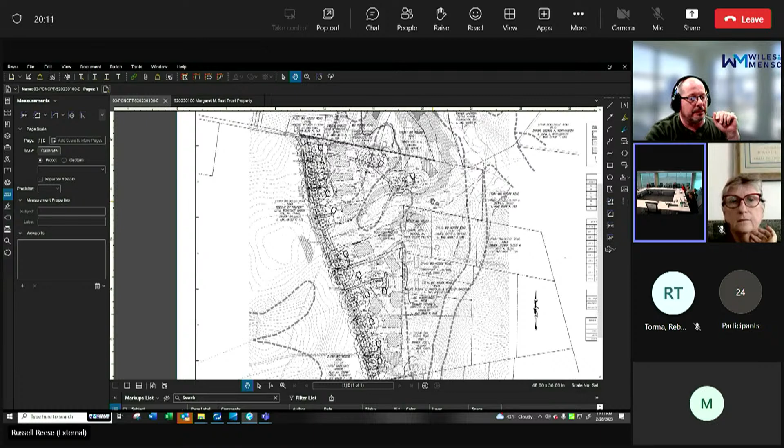I'm going to stop sharing unless you want me to keep it up. No, that's fine. I mean, I would rather focus our comments on the plan we reviewed rather than the one you've modified, because there's just no way to provide any feedback on that.

Yeah, understood. I was also hoping that we would have a chance to put up on the screen the design layout that we put together to illustrate our comments, and if it's a good time, we were hoping to cover that as well, Russ. Okay, I think it addresses some of the questions you have, and it also illustrates what we were trying to convey. Heidi's also here, and she has some comments.

Okay, yeah. Hey, if I could just jump in real quick regarding the 50-foot separation, Russ. So we want to start out with the proposal reflecting that 50-foot separation, and then we can work back from that once we go out and at least do the first round of testing.

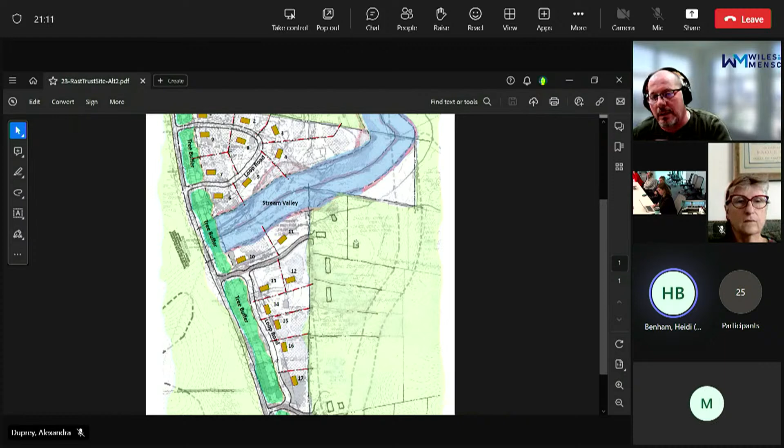So we want to know from soil conditions, is there fractured rock at this site? Do we have fast perc rates? If so, then all the more reason why we feel that 50-foot separation is justified. So we really need to see and evaluate soil conditions before we start relaxing that 50-foot separation. It's possible, we just want to get out there and see. Yeah, got it, thank you.

So let's have Alex cover our design comments first, and then others weigh in as well as we go. Sure, I would like to check with the applicant if you have any questions on the design comments, but I'm happy to also just go through them briefly. If you just go through them, I think that'd be better. Okay.

So some of the things we mentioned, we had said that the stream valley buffer will need to be widened to current standards. Right now you have it at 100 feet, and so it may need to be widened to 125 or 150. We also suggested a front tree buffer that you can see on the western side of the property, and so that's something you might want to take into account as you're continuing to reconfigure the site to try to get your maximum lot sizes and numbers.

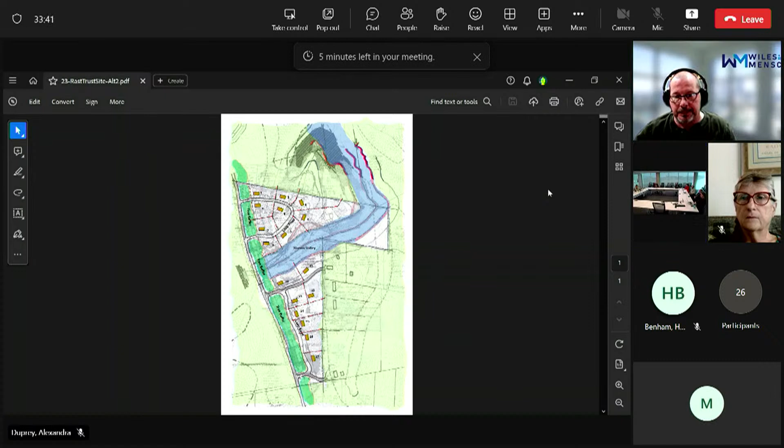Hey Russ, this is Mark Etheridge. Just want to make sure it's clear that on a concept, we can't support a waiver. That was one of the concerns with the small lots with the well and septic, there wasn't any room for stormwater, so that wasn't going to happen. This is new development, it's got to meet all the requirements of MDE with the ESD, so when you come in with something, keep in mind there's got to be a reasonable expectation that we're going to get full stormwater management on each of the lots. Thank you, Mark. We've got a concept that's going to have to get reworked if we change directions, but we're very cognizant of that.

Thanks, okay, any questions you got? You know how to get in touch with me. We can always discuss it. Yeah, thank you, okay.

I like that you got 17 lots, that's good. We were trying to get as many lots as we could while respecting the natural features and buffer. But keep in mind that those lots are drawn without the use of CAD and calculations for minimum lot size needed for septic, so take that for what it's worth. It's a sketch, and your NRI might show that stream buffer is going to get bigger.

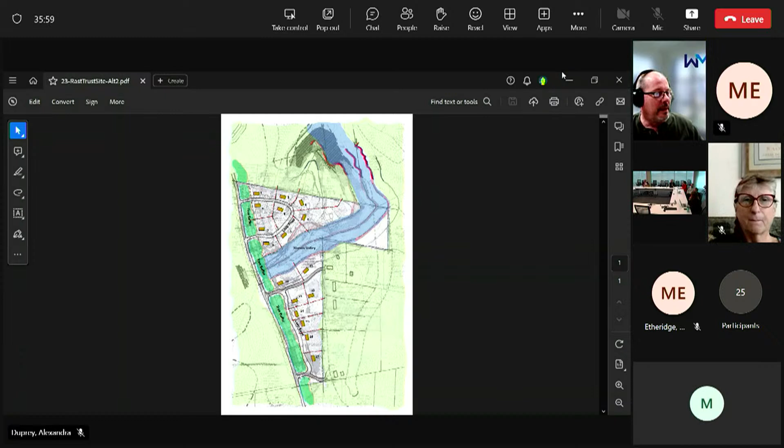Maggie Rast is representing ownership here. Any questions, Maggie? Nope, just taking it all in. Okay, alright, and Maggie, we should have a call after this just to round up and see what next steps are. I think that's all the questions I can think of off the top of my head right now.

Anything else from staff? Any questions for me? I would say keep in mind that any application you put forward will need to go before the Rustic Roads Advisory Board. Getting on that agenda whenever you have an application ready would be to your benefit. Is that something right at preliminary plan, or can we get in front of that? I would schedule it during that review, just in case things change during a preliminary plan review process, but I would do it as soon as you get some feedback to an application.

Yes, okay great. Again, the long-term question to be answered is soil performance, so we got to get there first. I just think you want to have the Rustic Roads Advisory Board review a plan that's very similar, if not the same, that the board would review too. That way it's all consistent. Understood, yeah, thank you.

Are there any other questions you have? Because once this meeting is adjourned, this concept plan is done as far as our review. Yeah, no, I'm good. Thank you, okay.